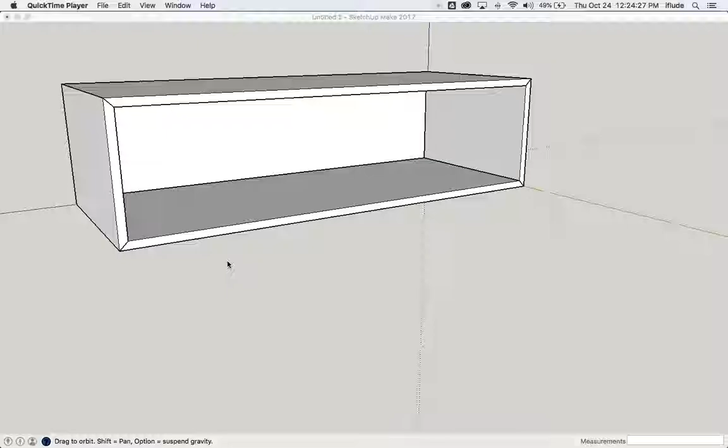So the next step in SketchUp with this little project is to draw out the frame of the feet. And if we look at the booklet, we can see that the foot is 1100 by 200, which means it's exactly the same width here as the cabinet on top, which gives us a nice opportunity to use what we've already drawn in order to help us draw the next part.

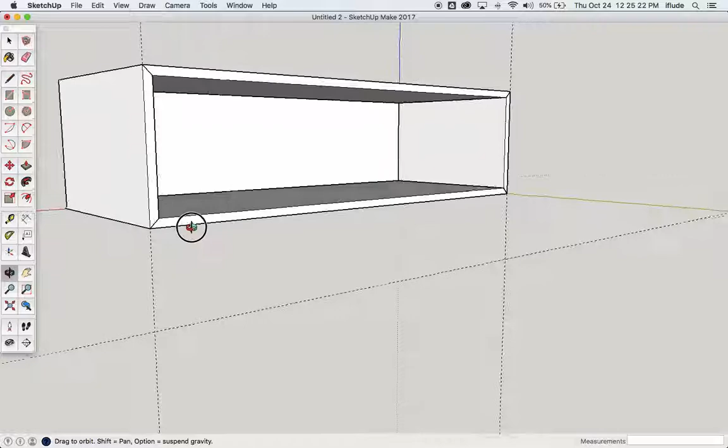So take a guideline here, snap it onto that edge, take another guideline here, snap it onto that edge, and draw a guideline down here by how much again? Let's have a look. 200. Enter. Alright, so that rectangle there that I've just guidelined out using those three guidelines is basically the height, and I can use a rectangle that I draw in here from that point to that point in order to construct the shape of the foot.

So let's have a look back at the booklet, and we can see that we need for the top of the leg, this angle here, we need to go in by 100 at the top. So let's get a guideline, type 100. That's 100 as well. And then take my pencil tool, draw my line from there to there. Pencil tool from there to there. Alright, that's the first one drawn. Now, what else have we got?

Now we can see here that the height is 90, and we can see that it goes up to here to a point where that's 170 in from the left and also from the right. You can also see that the foot is 40 wide. So let's first draw that line 40 in. 40, and then the same thing this end. That'll give us the starting point of our next line. You can see that that one's already 40, and then the next line we need to draw is 170 in from the end.

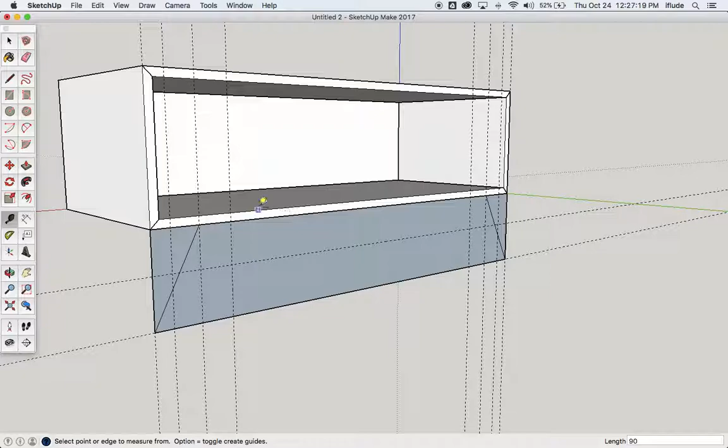So type 170, and again here 170, and then from the top we drag a guideline down by 90, which should then give us the next line from that point, which is 40 in, and that goes to the intersection of the horizontal line 90 from the top and the vertical line 170 in from the side. And I can go along and make sure I'm in the correct place, and then draw down, zooming in to make sure that I can snap on the right place to there.

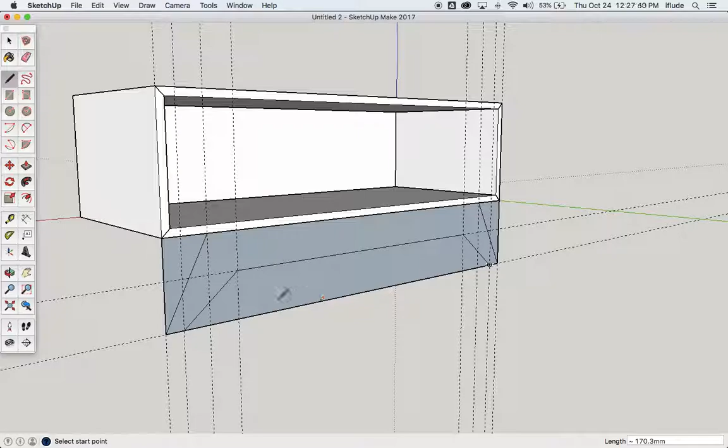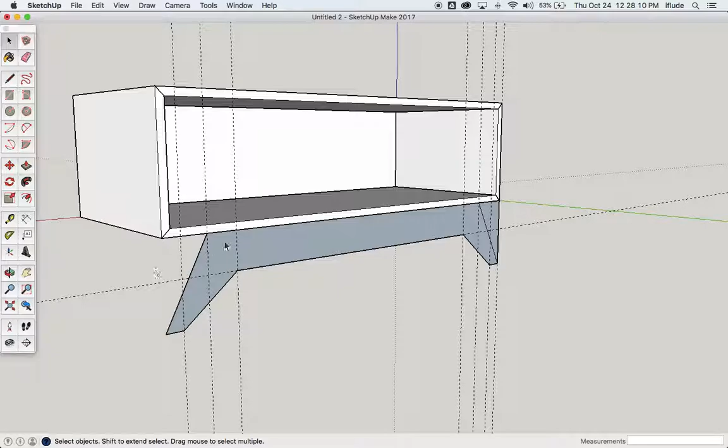Now that gives me the basic shape of my leg. So I can then use not the push-pull tool, but the select tool to select that line and that surface. You can see that I'm dragging from right to left. I've got the dotted line around the shape that I'm dragging, which means that it selects anything it touches. And there's my basic shape.

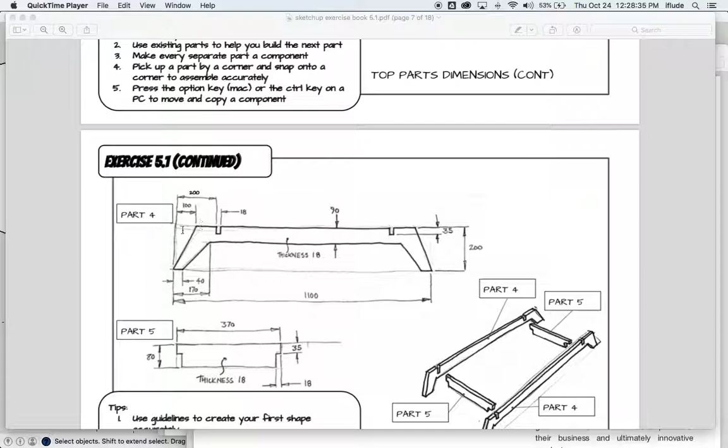Now, having thought about it, since these details here are defined by a distance from the end, I could bring those two pieces that I just deleted back. However, since I have the end of the box to refer to, I'm going to just leave it as it is for now.

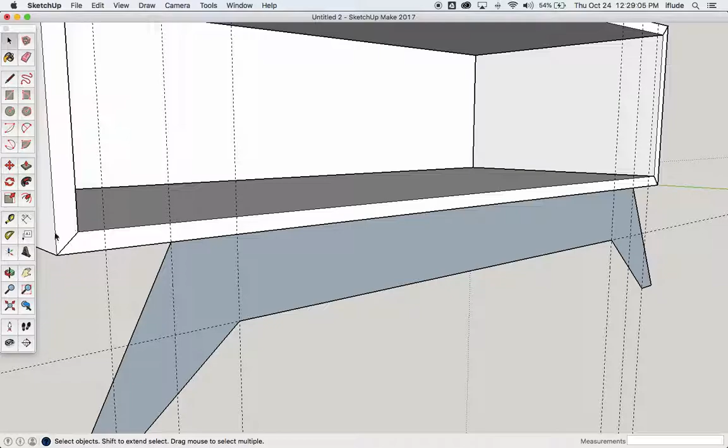Alright, so next step is to put in these little slots here. They're 200 to the beginning of the slot, and it's 18 wide, and you can see here that it's 35 deep. So let's do 200 to start with. 200 in from the end, guideline, 200, and again 18, and then one down, 35. I'm going to do the same at this end, 200, from that one 18, and you'll already have that 35 guideline down there.

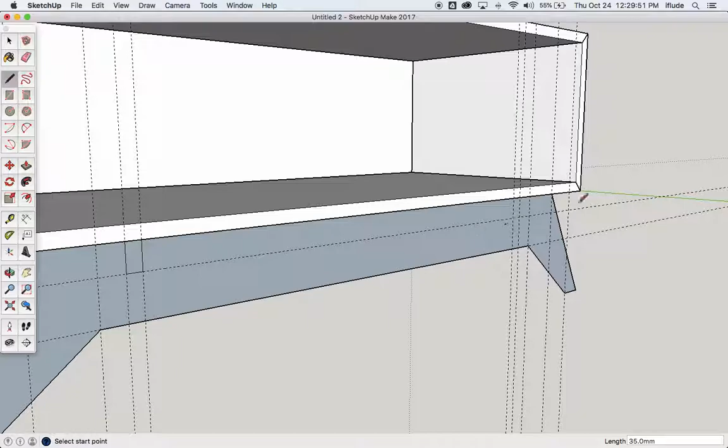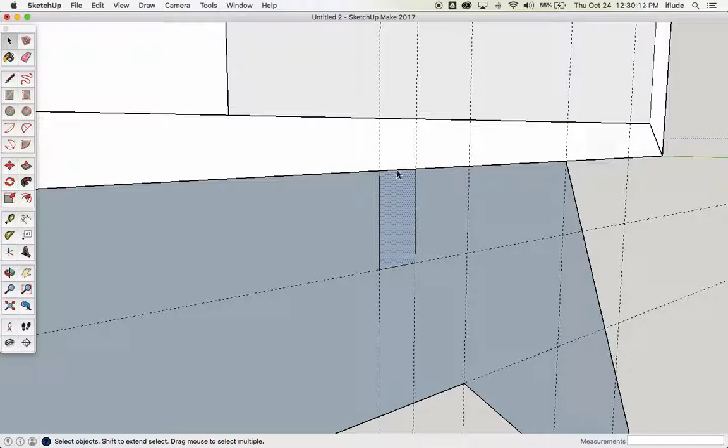So now I can take my pencil tool, making sure that I get on that intersection so I'm accurate. Same thing here, intersection to intersection to intersection to intersection, and just take my selection tool, then the line there. You might have trouble seeing the selection that I'm making here, but you can see that I've taken away the line, which also then removes the surface. Now all I need to do is make that 18 thick and make it into a component.

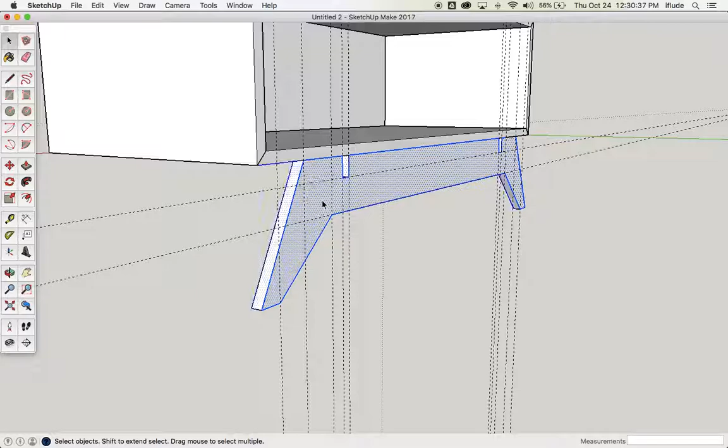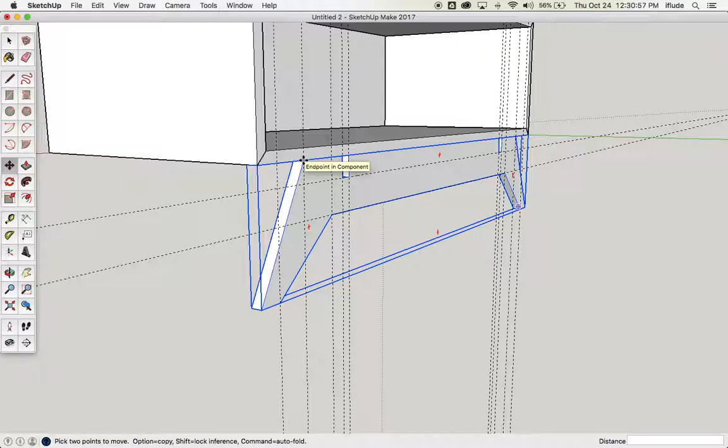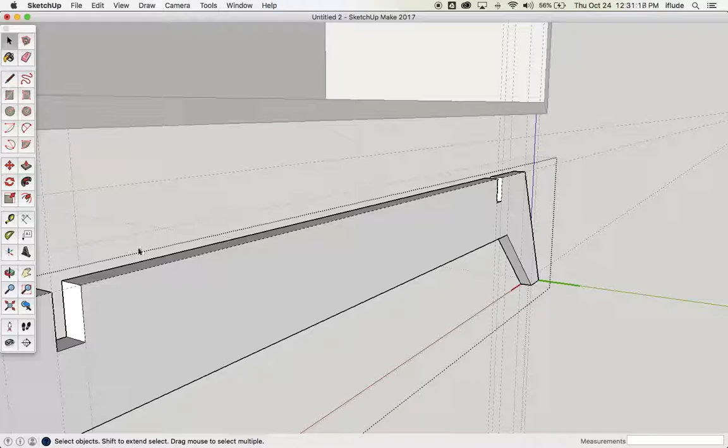Now, you may have noticed when I just selected the whole thing that a couple of extra lines lit up, so what I'm going to do is check it now by moving it down, using the guideline just a little way down. And now you can see that there's a couple of extra lines that I don't need, so I'm just going to select them and delete them. Lines there are fine. Lines here are fine. Good. So then we can just hit to the side to get it back out of editing mode, and then move it back up to where it was, snapping onto that line.

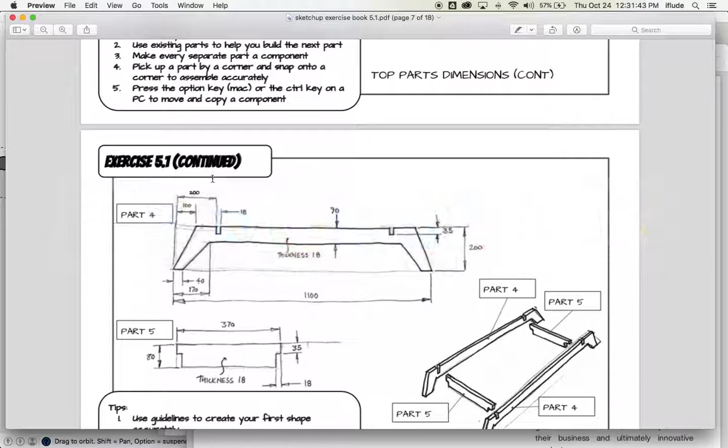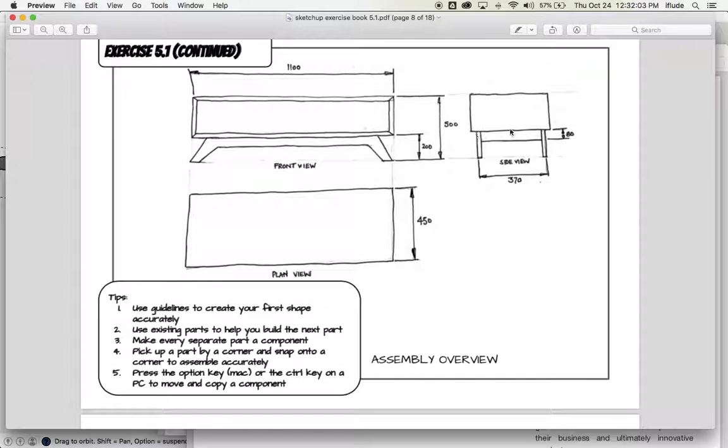Now the final thing I'm going to do here is just move this leg back to where it should be relative to the cabinet at the top. And if we check the first page here of the booklet, oh no, actually it's the last page of the booklet, you can see that there is a difference here between this distance of 370 and this of 450, the difference being 80, so we can assume that it's 40 either side. So I'm going to go back to SketchUp and move this piece in here by 40 in the green direction. 40 that way. There we go, perfect.

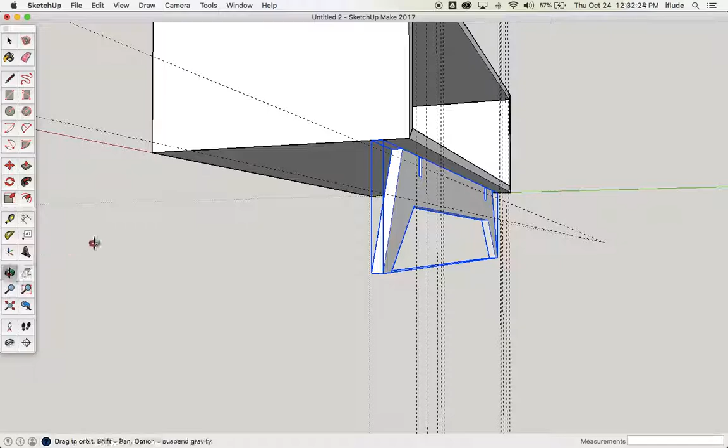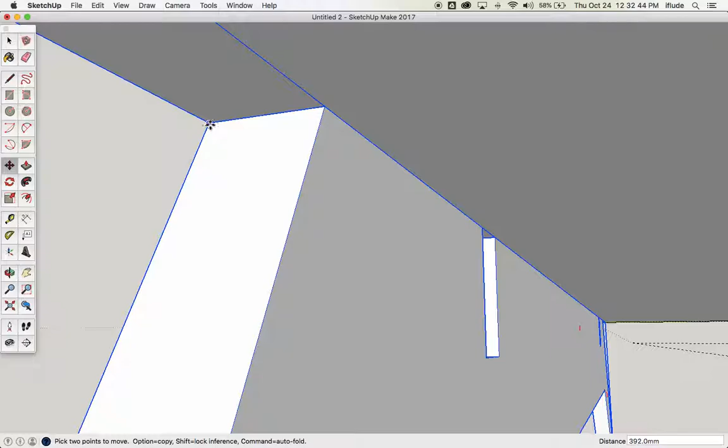And while I'm about it, I may as well now take my move tool, and this time I do want to make a copy by picking it up by that corner, dragging it along the green axis, locking it into the green axis until it snaps onto that line there. And now I'm going to move it back by 40. Now that gives me the position of the two legs of the cabinet.